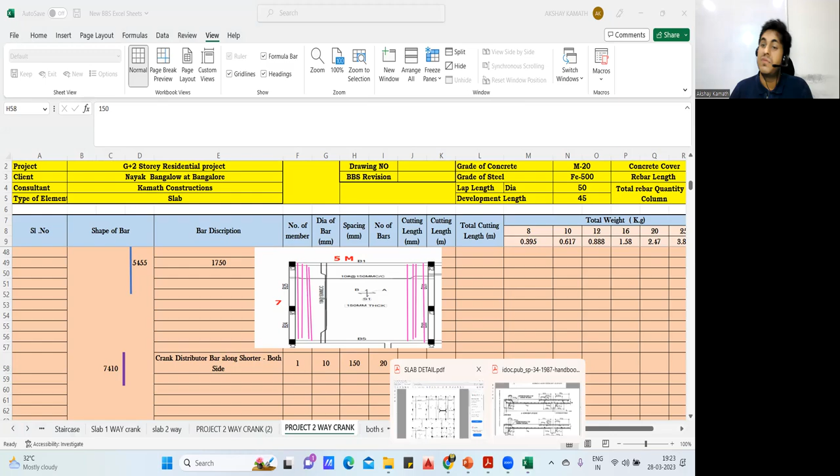Simple, fine. So now again for crank distributor, number of member is 1, diameter is 10, and spacing is 150. You'll ask me where it is mentioned. See, all the things will not be mentioned in the slab drawing. In the footing, column, beam, they mention it. In the slab, usually they mention shorter span bar and longer span bar. Crank distributor and top extra bar, they don't mention anything. It is what we practice on site.

So usually remember, your crank distributor diameter and spacing will be similar to your longer direction bar. This is your longer direction bar, isn't it? If you're putting your crank distributor like this, take whatever diameter you have put in the longer span bar - it's 10 dia at 150. Crank distributor also will be 10 dia at 150.

If you're putting along the shorter span, whatever main reinforcement you have provided along the shorter span - that is 10 dia at 150 - this also will be 10 dia at 150. Similarly, your top extra bar, whatever main reinforcement you provided, it's 10 dia at 150, but that spacing you have to double. If it is 150, your top extra will be at 300 center to center spacing, because whatever number of bars you get in the main reinforcement, that much amount of top extra is going to come.

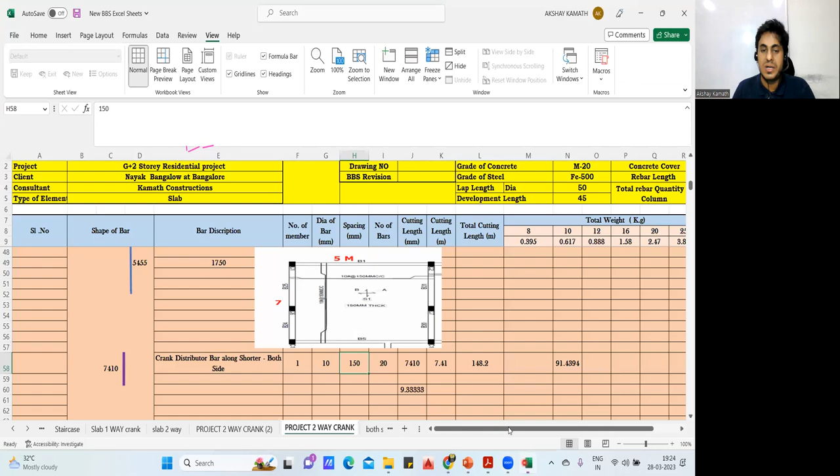So if your main bar, for example, if you don't understand - what is the main reinforcement I got? 25 plus 24 is 49 number of main reinforcement bars. So when I calculate the top extra, top extra also will be 49 only. Getting my point? In case of two-way slab, it won't be 49, because crank distribution - in case of one-way slab, it will be 49. I'll prove that also.

See how much it was? 26 number of bars you had got as main reinforcement, and your top extra also should be 26 only. Of course, 28 we got - the reason was we added plus one there, on both sides. But usually, since it's a round off what we have done, actually it is 26 only, because it cannot be 28. If this is 28, this also will be 28 then.

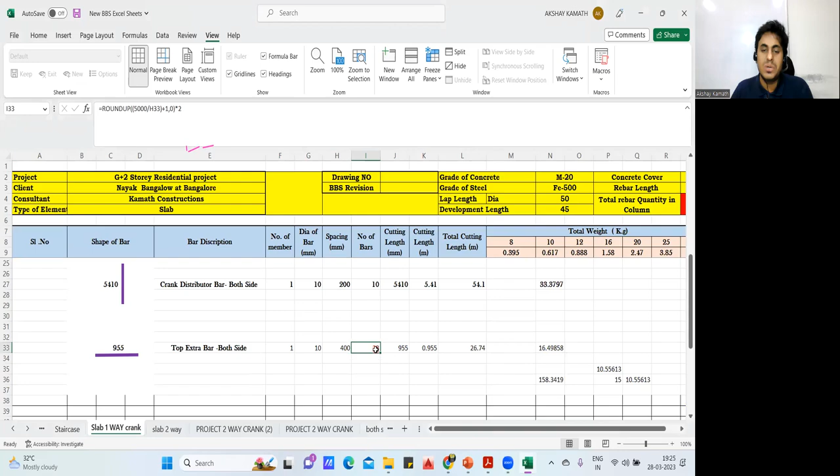Similarly, your distribution, anyhow it's a one-way slab, you don't put top extra here. So this will actually be 26. So if you ask me how many top - see, this is top extra. Wherever your bottom bar has gone, only there your top extra will come. So don't be under the impression that your top extra bar will be more. No, whatever main reinforcement comes, that much only top extra is going to come.

So this is done, this is done, this is done. Fine, now come here. So spacing is 150 - you have to assume it to be 150. So number of bars - I have to take 5 meters. So this is 5 meter, but L by 4: 5,000 divided by 4 is 1250. So 1250 divided by spacing of crank distributor which is 150, and plus 1 I'll do.

So I'll get 10 number of bars. Since on both sides I have to put crank distributor on this side and crank distributor on this side, I'll multiply this value by 2. So 20 number of bars I'll get. So cutting length will be 7410, this is 7.41. Total cutting length will be 7.41 into 20 number of bars into number of member which is 1. So it is 148.2 meter. Since it's a 10 diameter bar, 148.2 into 0.617 will be 91.43 kg.

Simple, so crank distributor along the shorter span I found. Now along the longer span also you have to find, because it's a two-way slab. So again, now I'll find crank distributor on this side.

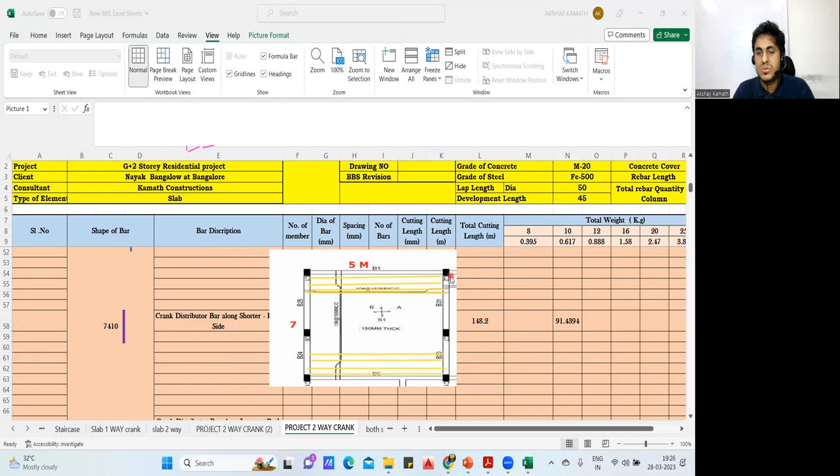Similarly on this side. So tell me what is the cutting length of this? Same, 230 plus this 5 meter plus 230 minus 1 cover from here, minus 1 cover from here. Okay, same thing I've done it here: 230 plus 5,000 plus 230 minus 25 from here, minus 25 from here.

So crank distributor bar along the longer span on both the sides. So again, number of member is 1, dia is 10, spacing is again 150 because your distribution bar also was 10 at 150. This also is 150. Sometimes they may tell you the crank distribution spacing directly, in that case whatever is given, that you have to take.

But right now there is nothing mentioned, so this is what we practice. Now come to the number of bar. So number of bar, I have to take opposite direction, that is 7000 divided by 4 is 1750. So 1750 divide by 150 plus 1, and multiply by 2. So 26 number of bar is required. That means 13 crank bar will come here and 13 crank distributor will come here.

Got it? Fine. So cutting length will be 5410. So this is 5.41, and total will be 5.41 into 26 into 1. This will be 140.66, and since it's a 10 diameter bar, 140.66 into 0.617 will be 86.78 kg of steel is required.

So 90% of my BBS is ready. Last one portion is left out, that is top extra bar. Now come to the top extra bar. So next is top extra bar. So again, how you'll find the top extra bar? Simple.

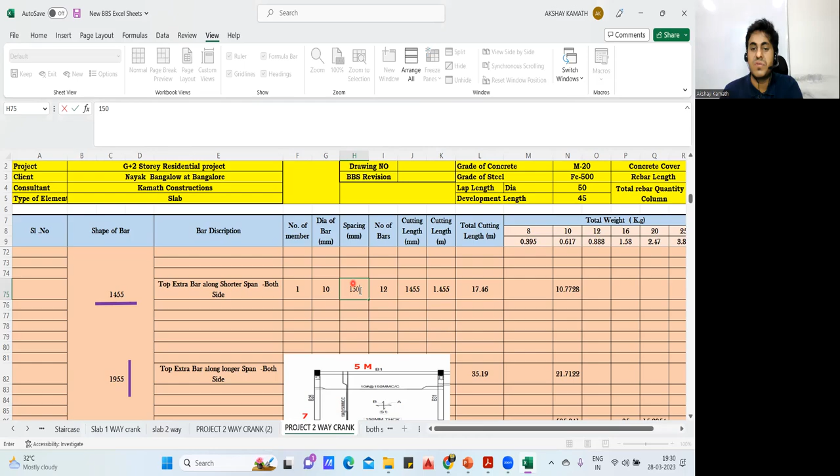Suppose if you don't want to multiply by 2, in that case what you're supposed to do? In that case, you have to keep spacing 150. You'll get the same answer. See, you got 24, right? If you do the spacing 150, then you'll get 24. Else you keep spacing 300 and multiply by 2 because both sides it will take, then also you'll get 24. So this is the right way of doing it, so that practically on the site also you are placing the top extra by 300.

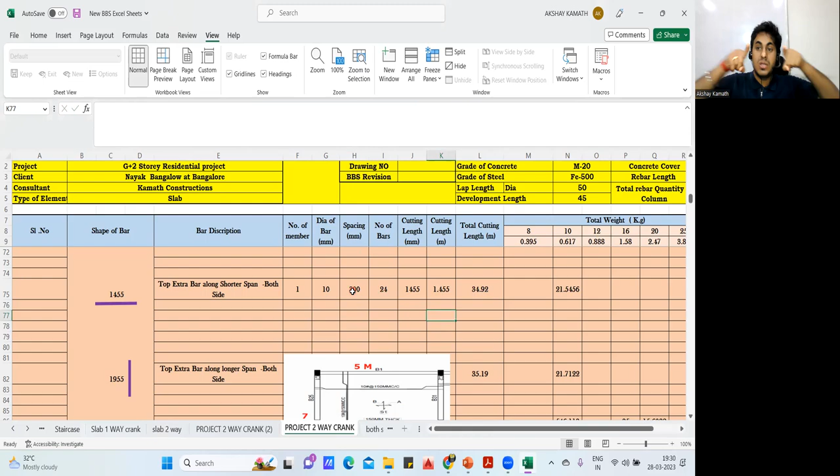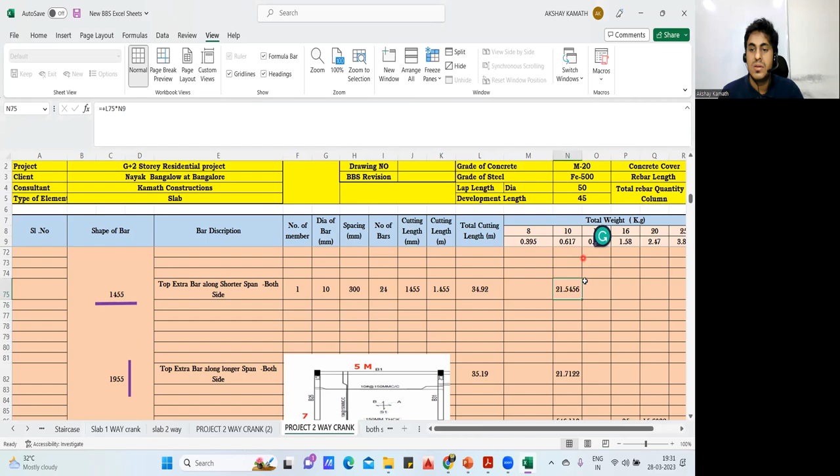Okay. So cutting length is 1455. Cutting length in meter is 1.455. Total cutting length will be 1.455 into 24 number of bar into 1, 34.92, and total weight will be 34.92 into 0.617 will be 21.54 kg of steel is required.

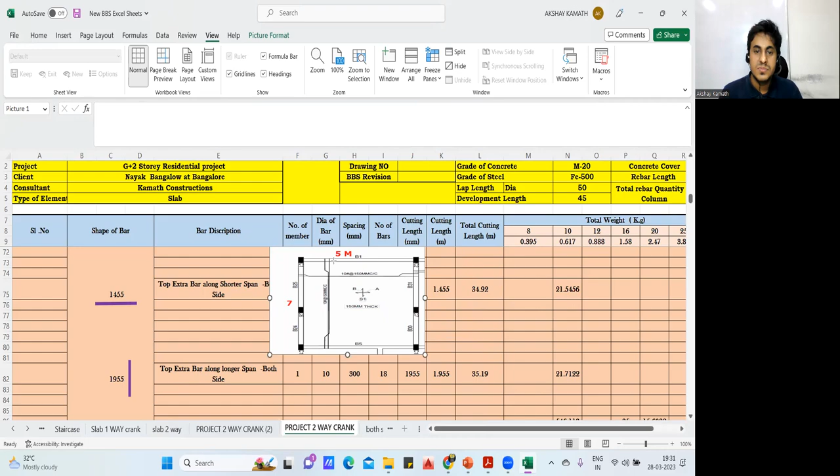So along the shorter span is done. Now do along the longer span. Now along the longer span, your crank distributor will be put only up to here, like this. This is your L by 2. Similarly, this is L by 2. And the remaining portion what you have here, already you have put a crank distributor, so you don't require top extra. Crank distributor is already put, which you already calculated, so you don't require top extra here.

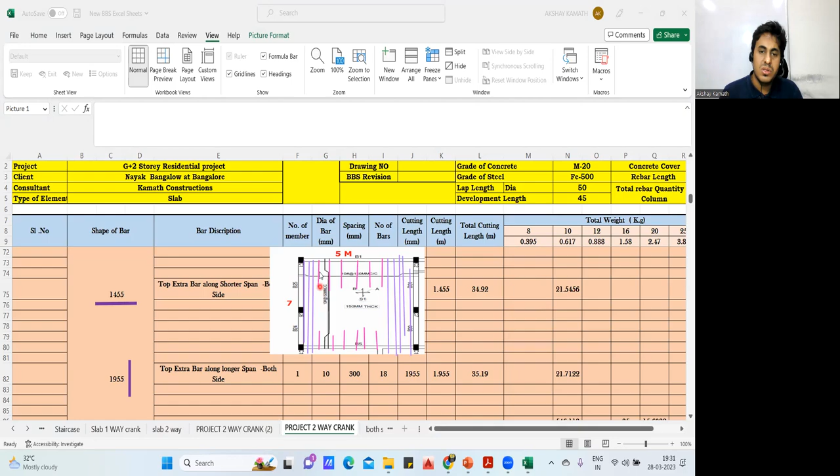Okay, fine. So this cutting length again, this is 7000. So this will be, crank distributor will be L by 4. So 7000 divided by 4 will be 1750 plus 230 minus 25. So it will be 1955.

So top extra bar along the longer span, that is both sides. Again, number of member is 1, dia is 10, spacing, we are increasing the spacing.

Main bar, your longer span, main bar is actually 150. So here it is 300. Suppose if your longer span bar, that is this bar...

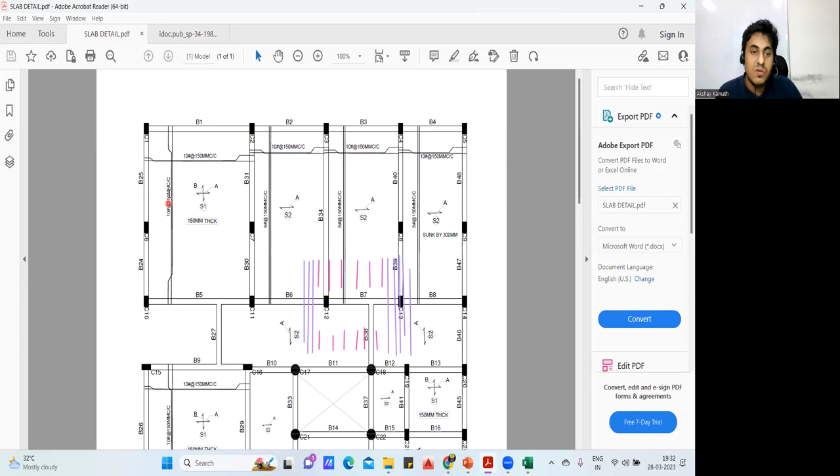Suppose instead of 150, suppose here 10 diameter at 150 is given, so top extra will be double of this. 150 into 2 is 300. Suppose if it was given 200, your top extra would be at 400. In that case, on the Excel sheet, you would have put 400. But here it is 150, so I'm putting 300 here. Got it? So whatever is your main reinforcement, double of that will be the top extra.

So 300. Number of bars again, since it is L by 2, 5000 divided by 2 is 2500. So this span from here to here is 2500 divided by 300. Again no plus 1, because already this crank distributor plus 1 you are done. So again you don't have to do here. So if you do, what will happen?

Nothing will happen, just the steel will increase, which practically you don't do that. Practically, that much space you'll not be having. Plus 1 you're doing 2-3 times, that much bar cannot accommodate. But if you do, nothing wrong, it's fine.

1.955, and total cutting length will be 1.955 into 18 number of bars into 1, if you do it will be 35.19. Since it's a 10 diameter bar, 35.19 into 0.617 will be 21.712 kg of steel is required. So in this way, my entire two-way slab BBS is ready.

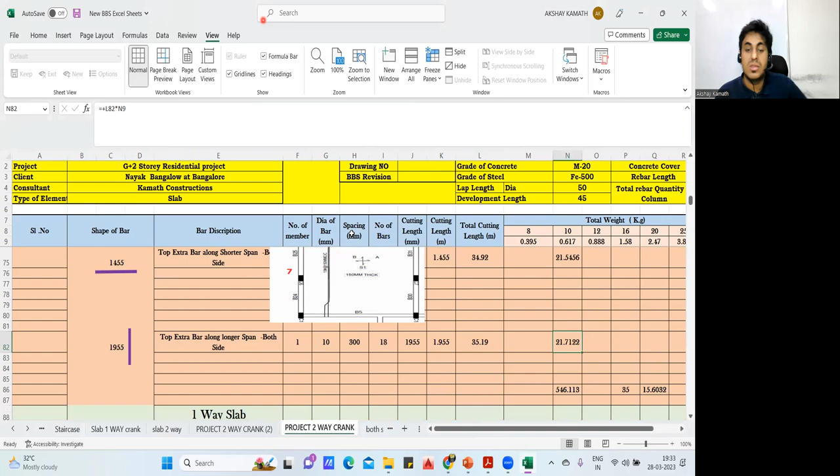Now if you ask me, sir, how much steel is required here? I calculated everything, 21 plus 21 plus 86, 91, 77, add everything, all the 10 diameter bars. So you require 546.113 kg of steel in this two-way slab.

So in this way I've done the BBS for this particular slab. If somebody asks you tomorrow, say I want to do only one slab, let us consider, and I want to do the BBS for this, tell me how much steel is required. So you did a BBS, you got 546. You say roughly we bring 600 kg of steel, let's say 0.6 ton of steel, I think that is sufficient for you to prepare the slab reinforcement.

So that is why the BBS has to be done. Now practically, do you think exactly 546.113 of steel will go? No, another 20-30 kg extra may come because on site we don't know what is the actual measurement, what has happened on the site. Your slab may not be exactly 5 meters, it may be 5.1 or 5.2.

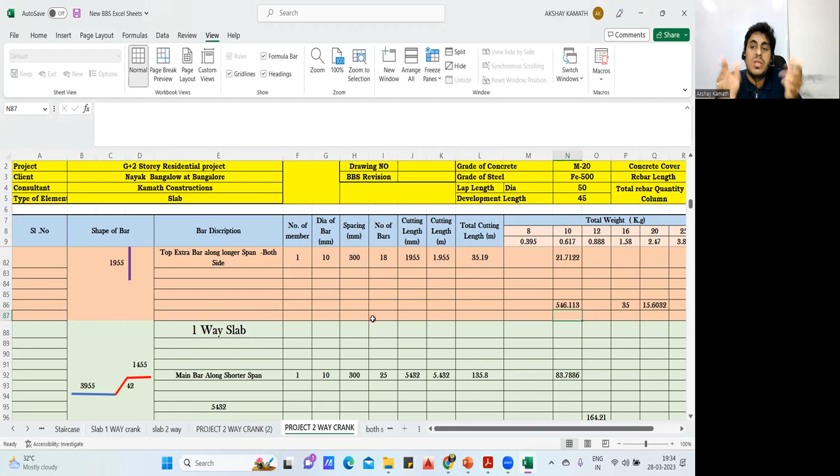Because these are concrete structures, they are prone to expand and contract, shrink and all. And your reinforcement, whatever centering you've done, whatever shuttering you've done, they're prone to either expand or sometimes contract. So that is why exactly 5 meters you don't get on the site.

And do you think all the bar benders will keep this bar at exactly 300 center to center spacing? That also practically doesn't happen. Do you think practically on the site, if you take a tape and measure, this will be exactly 300? Nothing. There may be 290 also.

So if you do 290, 295 times, there is an error of 50 where it can accommodate one more extra bar, right? So all this bar at 150, 150, you don't find it exactly. But if there is proper strict quality control and all, you can try to play with all these things and you can minimize those extra bars which will go into this.

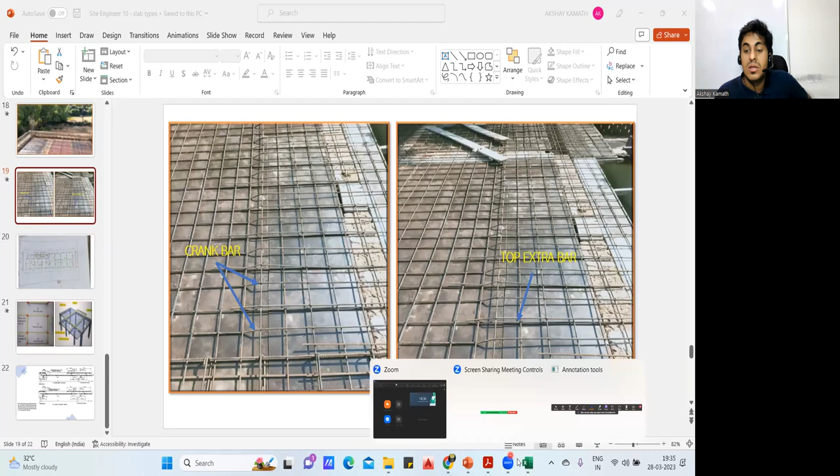So that is why checking is very important on the site. If you do proper checking, if you check exactly at 150 you're placing, then exactly your answer will match what calculation you have done here.

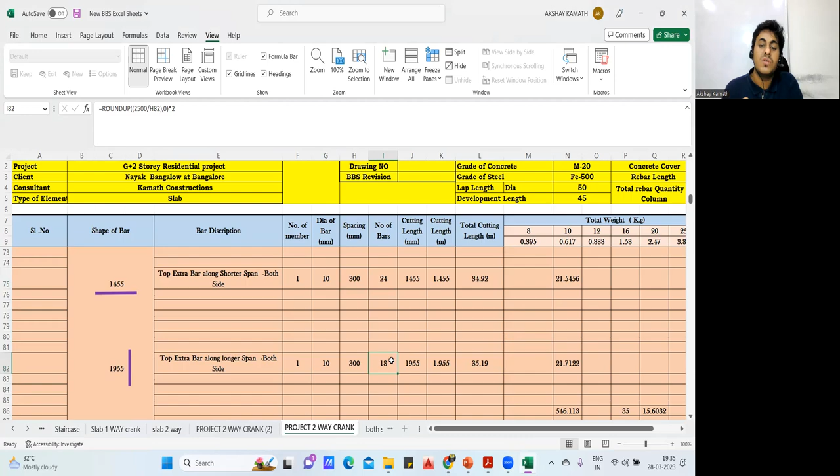But if one or two bars extra go, that doesn't matter, no problem. Less should not happen. More if it goes, it's okay, but too much more is also not good. Less should not happen, instead of 18, if 19 bars go, it's okay, but instead of 18, 17 bars should not go, 16 bars should not come. 18 minimum I require, 19 if it comes, well and good, but 25 should not come. That means unnecessarily increasing the steel there.

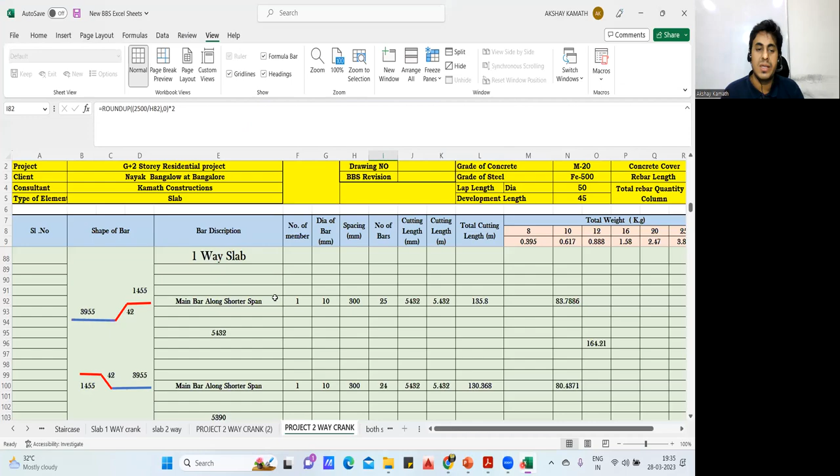Okay fine, so in the next lecture I'll go again with the same calculation. Next lecture also I'll start with one-way slab. Again your length is also 5 meter, this is 7 meter. Now again I won't explain to the level I've explained, directly I'll show you the Excel sheets and keep on explaining you. That's it. So this is again second panel, and this is sunken portion.

3 panels I have done, Excel sheet is ready for this panel, and the answer remains the same. Whatever answer you get here, if you multiply by 3, 1, 2, 3, directly 3 answers you are gonna get. But we have to break it down separately and do the calculation. So try to prepare the Excel sheets up to here. We'll see you back in the next lecture. Thank you.